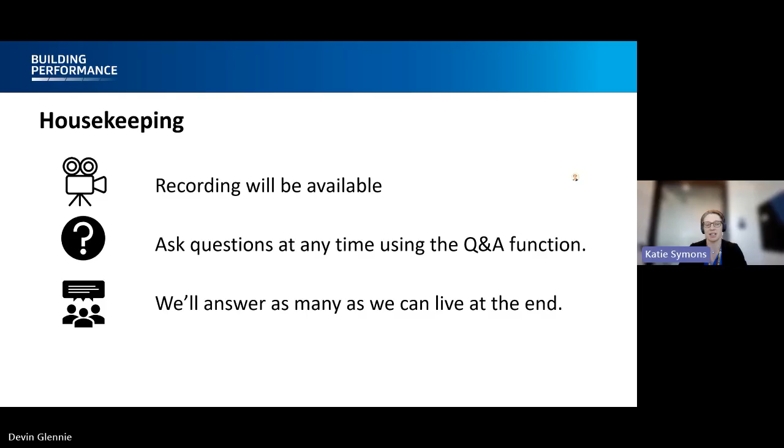First, a quick reminder about the background to this work and how it fits into our wider Overseas Building Products Work Programme. For those of you who watched the webinar in June, you will recall that the building product specifications is one of 3 pathways MBIE has been developing to make it easier to use overseas building products here in Aotearoa, New Zealand. The intention of this work is to increase competition for building products, reducing their costs to support the government's primary objective of making it cheaper and easier to build here.

Also worth noting briefly that the building product specification is the only one of these pathways that is currently live. More information on implementation timeframes for the other 2 pathways is expected around mid-September. So please make sure you are signed up to our mailing list to hear about this when it happens. But back to the BPS.

One of the drivers for the development of the BPS was acknowledging that a barrier to using overseas products is the wide range of product standards that are cited across our many acceptable solutions and verification methods. So up until now, of the approximately 450 standards cited in our AS and VM documents, about 250 of them were building product standards, and a majority of these product standards, about 140, were single standards for a given product. There were no alternative options. These standards were also spread out across a number of acceptable solutions and verification methods, meaning it was difficult to identify all the standards that a single product must comply with.

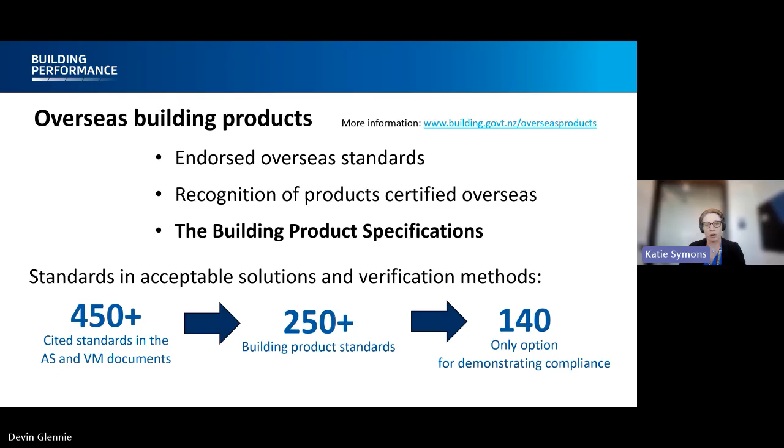So, to help support the use of overseas products, we have introduced the Building Product Specifications, the BPS. The BPS is intended to be a central resource for building product standards to be used alongside acceptable solutions and verification methods to demonstrate compliance with the building code. This is intended to provide more options for building products, but not change minimum requirements. The BPS contains product specification information, including citations of product standards that were previously found in acceptable solutions and verification methods. Alongside this product information that already existed, the BPS contains new citations of additional product standards that have been assessed as requiring equivalent or better performance.

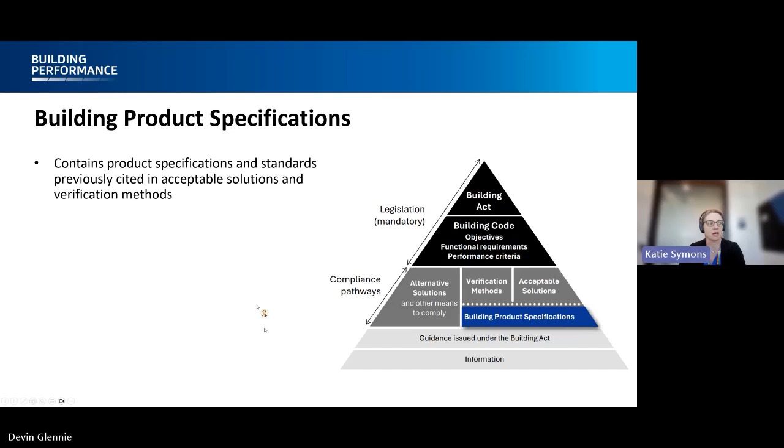Acceptable solutions and verification methods can now reference the BPS for information related to building products. When they do this, the specification requirements in the BPS become part of the acceptable solution or verification method. However, the acceptable solution and verification methods must still be adhered to in order to comply via those compliance pathways, and that includes how the specified products are used within the scope of the AS and VM and any limitations. So in other words, you cannot use the BPS in isolation to demonstrate compliance.

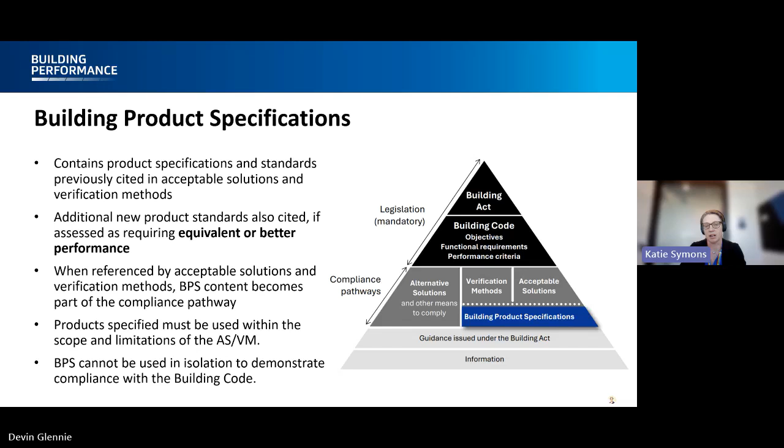Just because a building product is made or tested to a standard cited in the BPS, it doesn't necessarily mean that the building work complies with the building code. So we ran a consultation on the draft of this document back in June, and we'd like to thank everyone that took the time to make a submission to us through that process.

We proposed over 120 standards for the first edition of the BPS. The vast majority of them, around 90%, were either joint Australian New Zealand standards or were from other overseas jurisdictions, and around half of them were either new or updated product standards.

We received 71 submissions in the consultation, which largely agreed with the proposed standards, but we did make some changes as a result of your feedback, including citations to some of the proposed timber and steel standards, and also minor changes to the document's section numbering.

And as part of the consultation, we also asked for suggestions of product standards we could consider for including in future editions of the BPS. And we received well over 100 of these, so thank you so much for that. This feedback is really valuable as we are already working on developing the content for the next edition.

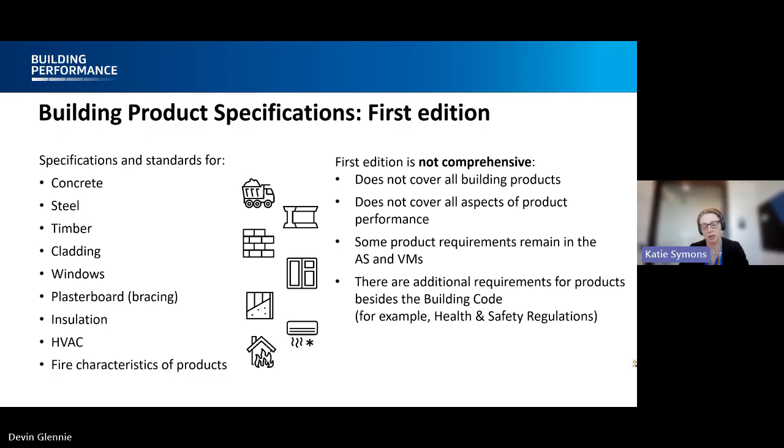But it is important to note that this first edition isn't comprehensive. The BPS isn't yet a complete repository of building product specification information. Some of this information still remains in the acceptable solutions and verification methods. There are gaps in the document. Some sections even say reserved for future use. So these are placeholders for us to come back to and add over time.

And even for products we do have sections for in the BPS, we may not have all the specification information for that product in relation to all the different building performance aspects that product contributes to. And there may be additional requirements for use of the product in Aotearoa New Zealand that aren't related to the building code, e.g. health and safety regulations. We're only dealing with requirements related to building code compliance in the BPS.

We do want to provide more compliance options in the BPS to improve its effectiveness. So if you do have suggestions for product standards or specifications that you feel are equivalent or better than our current product requirements, please get in touch. We'd love to hear from you and work together with you to make the BPS more comprehensive.

But I'll run through a couple of examples of how the BPS is working to provide more options for products within the existing compliance pathways. So fibre cement cladding is an example of a product that has specification requirements within E2/AS1, an acceptable solution for demonstrating compliance with the external moisture requirements of the building code.

The section detailing the requirements for fibre cement cladding in the previous, the third edition of E2/AS1, contained a citation to the joint Australian New Zealand standard AS/NZS 2908.2.

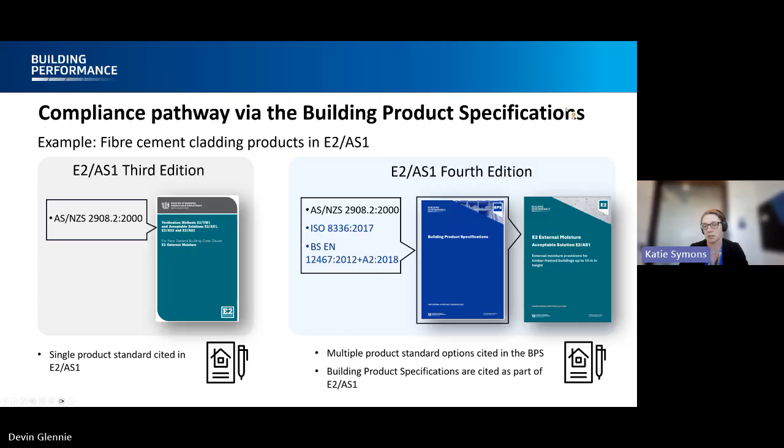So there's only one place you need to look to find the information for fire testing standards and specifications. This has been done across the suite of fire testing standards, removing multiple duplicated pages of content and providing a central resource for all the fire testing standards.

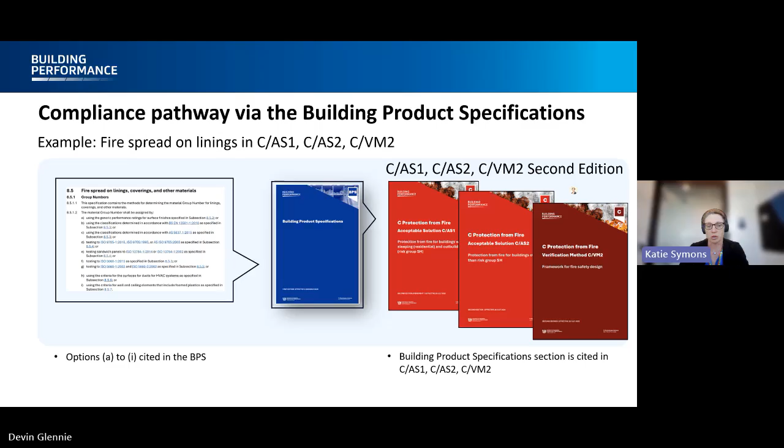So it is important to remember that in terms of building code compliance, the BPS only provides information on building products themselves and how they must be specified, not about building work. So this could include how the product is tested or fabricated, or any physical characteristics it must have. You still use the existing compliance pathways, the ASs and VMs, to determine how the building product must be used in building work to comply with the building code. The introduction of the BPS has not changed minimum requirements set out in those documents.

So at this point, it's a good point to segue into the other part of our presentation today, the new editions of the Acceptable Solution and Verification Method documents that were published alongside the BPS. To tell us more about those, I'm going to turn it over to my colleague, Devin Glennie. Hello, Devin. Would you like to introduce yourself? Tell us a bit about what you'll be talking about today.

Yeah, so my name is Devin Glennie. I'm Principal Advisor at Building Code. So here at MBIE for the last about 5 or 6 years, I've been working to try and get some consistency across our different acceptable solutions and verification methods and help with some of the publishing aspects. So today I'm going to talk about all the amendments that have been made to the various documents to support the BPS and everything else that's been published here a couple weeks ago.

To start off with, though, I'm going to talk about another announcement that was made on July 28th, so the same day the BPS was released. We also announced that we'd be looking at a 3-year review cycle for the building code. So this follows along similar trends in other countries where they have a predictable cycle, and that cycle is usually 2, 3, or 5 years, depending on your area of the world. So we're going to be looking at a 3-year cycle. So what does that mean? It means that we're in 2025. We're publishing a bunch of documents this year. Our next major update will be in 2028.

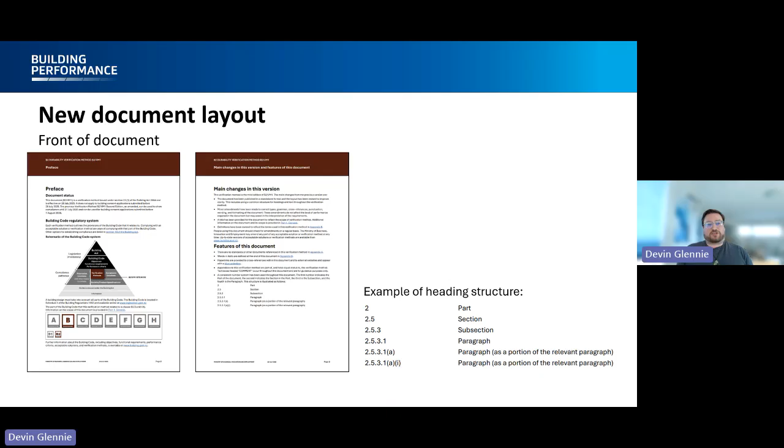The new layout also has an introduction page, which has the same 4 basic headings for every document. There's an introduction that talks about the scope of the document, items outside of the scope of the document, and the compliance pathway. So it gives you very basic information about what the document can be used for, what things are in scope, what things are out of scope, and what part of the building code it can be used to comply with.

Some of our documents historically have had none of this information. If you opened up the document, there'd be nothing there at all. It wouldn't tell you what buildings it could be used for. It wouldn't tell you what parts of the code it could be used for. And it is a lot more difficult to use if you have to first figure out what this thing even applies to. So we provided the same consistent level of information for each document.

There's other things within that part 1, depending on the document you're looking at. Some of that information may be about how to use the document, some of the basic input data, or there's even sections now that talk about the building product specifications and how they're used for compliance as well. So that's all contained within that part 1, some of the general information about the document.

You'll also notice that we've moved appendices to the end of these documents. So we have consistent appendices across each AS/VM: Appendix A, references, and Appendix B, definitions. Previously, these were at the front of a lot of our AS/VM documents, which means you'd have to scroll by them if you want to actually get to the content.

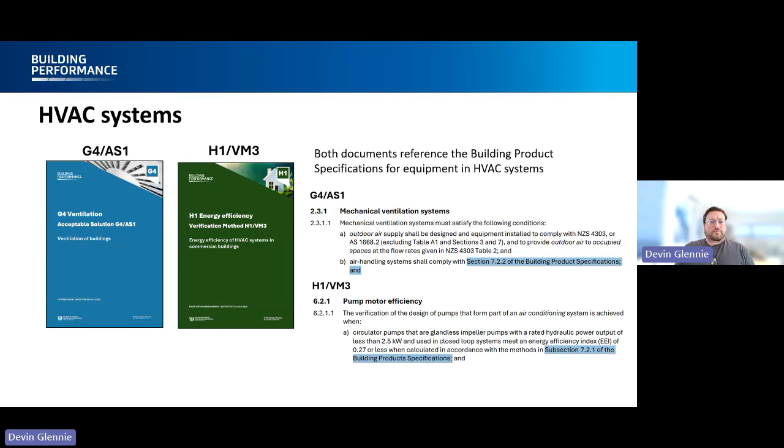So if you have things like checklists or templated reports or standard details you might be using, and if you want to know where those have gone, where they shifted between editions, you can use these information packs to find that information quite quickly. You can look for the old number, you can find the new number, and you can find out if anything has changed in that paragraph.

So those are all available on our website on that same link, the BCU 25. And we have these information packs for all the longer and more involved changes. So I think there's 10 or 11 of the 16 have these same kind of tables outlining all the changes.

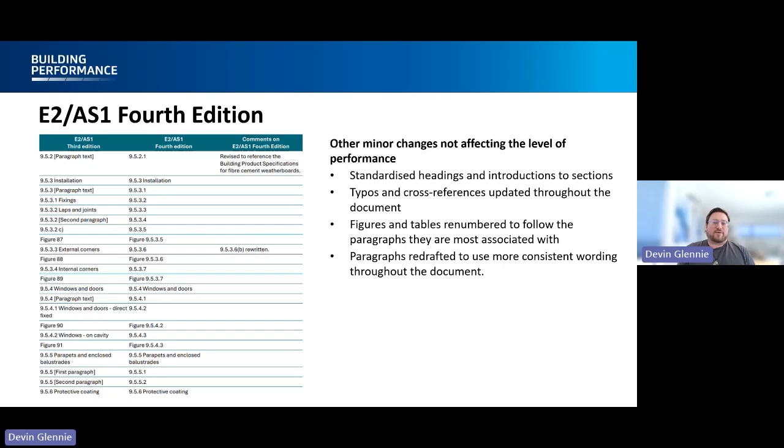And some of the paragraphs have been rewritten to use more consistent wording throughout the document. There's a number of defined terms in E2/AS1. However, not all the content was written to use those defined terms. We've tried to incorporate that where we could.

So we've tidied all that up. So now it's laid out in the same manner, in the same kind of numbering format, which can help ease of use in reading these documents. So the content actually hasn't changed. If you look across the 4th edition, those wordings and the requirements in the paragraphs have not changed, but some of those numberings have. So again, I would refer you back to those information packs we provided. It tells you where the old numberings are in the old edition and what the new numberings are in the 4th edition.

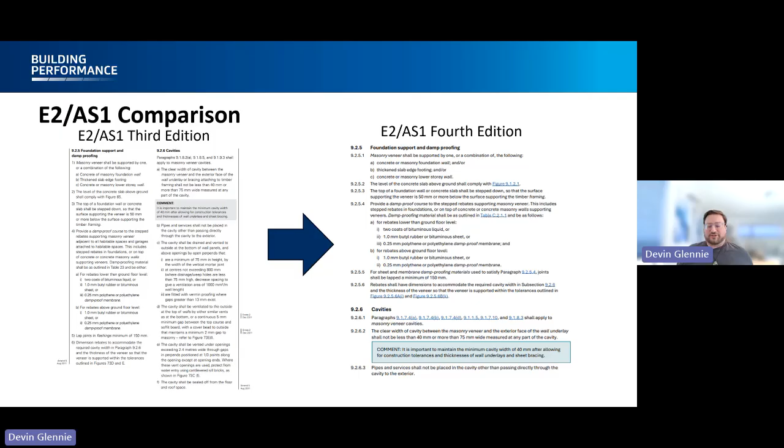Moving on to B2AS1. So the 3rd edition of this document references the building product specifications for some of the timber requirements. And as well, it's been updated into this new format. With referencing the timber requirements in the BPS, a lot of the content was actually moved from B2AS1 into the building product specifications. This is noted in those information packs. There's a number of instances where it tells you that it's been relocated. So a paragraph hasn't disappeared. The requirement is still there. It's just been relocated as it refers to a product specification as opposed to requirements on how it's used.

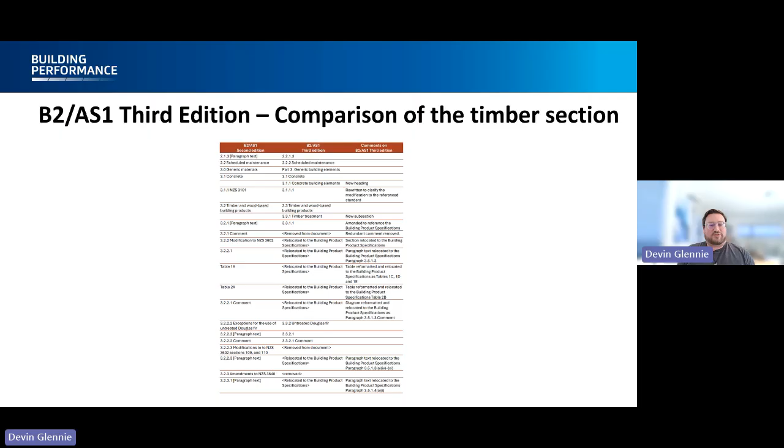So these are noted, and if you're trying to find this information, look at those information packs, and it can tell you exactly where things have gone. One thing to know about B2AS1, we did pick up a typo here in just the last week. It refers to section 3.6.1 of the building product specifications. This section doesn't exist. It's actually subsection 3.5.1. It's quite obvious because it tells you to go look at this section for 50-year durability, but that section doesn't even exist in the document.

And that's a consequence of some of the updates made post-consultation. It was one of these minor typos that just weren't fixed. So this section of B2AS1, just note for now, it refers to the wrong numberings. We'll be trying to update this when we can and try to resolve that issue. But like I said, it's a pretty obvious error because that section number doesn't exist, and the title of the actual subsection it points you to is the requirement.

Now on to some of the larger changes in the content structure. We're looking at CAS1, CAS2, and CVM2. So these 3 documents are used for compliance with protection from fire. Like Katie mentioned, all references to the fire testing standards have now been relocated to the building product specifications. So a complete removal of all that content, which has some big impacts. There were previously appendices in each one of these documents that outline those fire testing requirements. So those have all gone. They've all been consolidated in the building product specification. So a lot of the repeated text just completely removed from these documents.

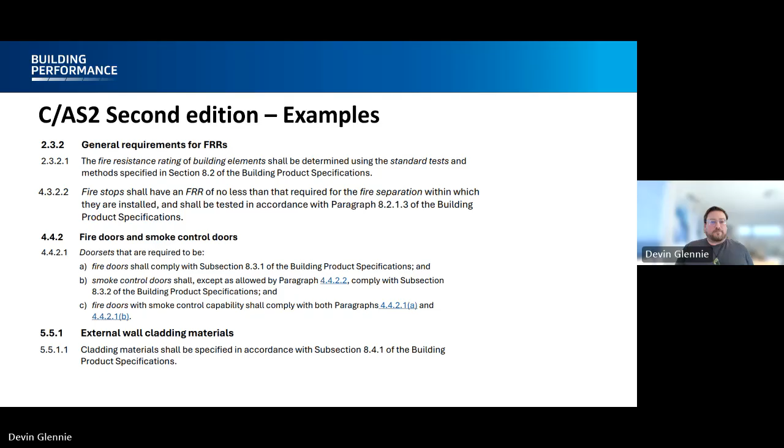So the comparison here of just how we've condensed down and simplified these headings. Here's one part, which is means of escape. It had 16 different sections in the previous edition. That's been condensed down to 9. And the headings that are gone, they've just been consolidated into different sections in the document. So some of those things like escape from basements only had a single paragraph, or things like signs only had a single sentence on what you needed to comply. And so that's been condensed down into the new edition.

The same things happened in part 4 and part 5 of the document, where I think part 4 had previously about 18 different headings. Now it's down to about 12 or 13. And part 5 the same. So kind of restructuring that content to make it a little bit easier to use and easier to navigate throughout the documents.

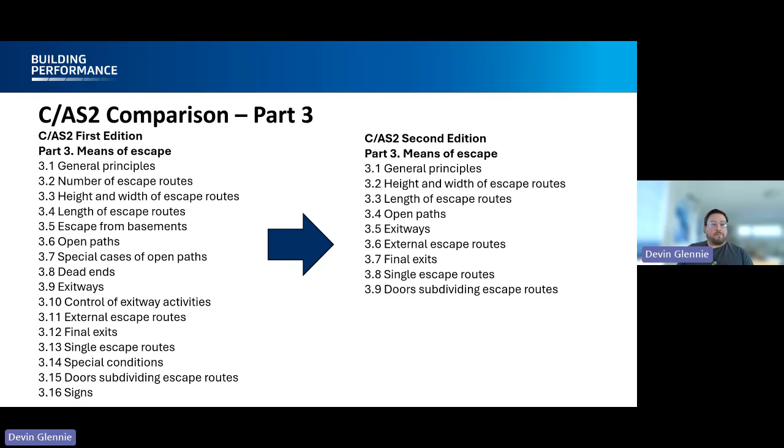Another thing to note about CAS2, another one of these typos we picked up. This one's actually already been updated. It was picked up on the first day it was published, and it was just simply a formatting error. So table 2.2.1.1, some of the values were previously showing without the superscripts, which can lead you to a different interpretation of what fire safety systems are actually required. So we've updated that. That's already online. It was changed the same day.

If you've downloaded the document in the past, you might just want to re-download it or at least print off that same page. That's the only page that's changed. If you're loading it in your browser, you might have to actually refresh the window before you get the new version, but essentially it's been already updated online.

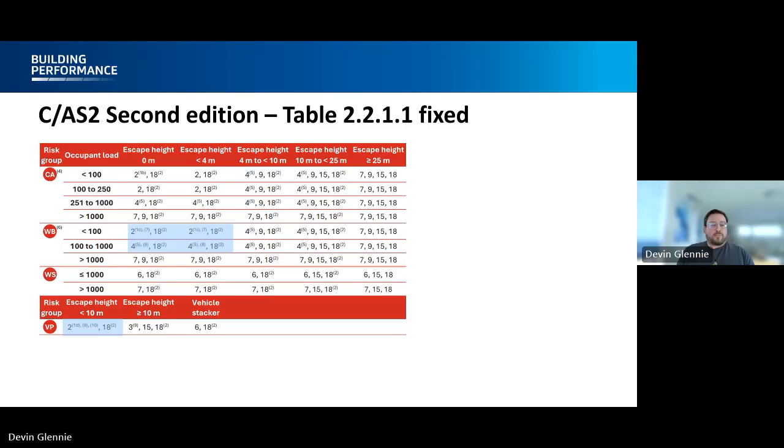Like I said, CVM2, a lot of the design scenarios have changed. This is just an example of the IS scenario where it was previously about a page of text outlining different fire testing requirements to determine group numbers. That's all been relocated to the building product specifications, and instead the design scenario just refers to the different sections in the BPS where they're relevant. So it's consolidated a lot of the content out of the verification method, which is only necessary for the product testing.

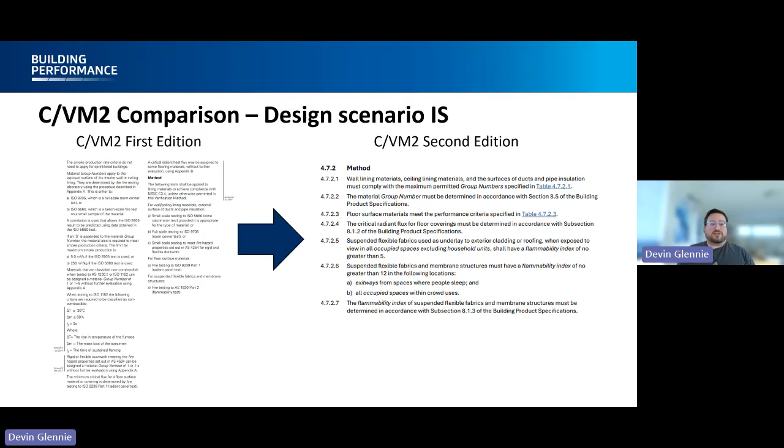Fire safety review. I kind of mentioned this at the start of this section, but we made an announcement last Friday on the next steps of our fire safety review. So in 2024, we consulted on issues in the fire safety provisions in the building code. This is based off a review that we had undertaken, incorporating stakeholder feedback and discussions with others in the industry about what the problems were in the building code.

So we put those in a discussion document. We consulted on it late last year. We analyzed the submissions this year, and suffice to say there was broad support for the issues we identified. Issues around the consistency of the requirements, the level of safety being provided, keeping up to date with new technology. There were a number of issues that were identified in the existing building code clauses.

So on Friday last week, 8th of August, the government announced plans to change those clauses, and we'll be working on proposed building code changes for CAB to consider early next year. So the announcement here is really that these clauses will probably be changing in the near future, or at least next year, and that the acceptable solutions and verification methods will have to be updated once new clauses are in place. We expect there'll be a transition period through that as well. So there's nothing on the immediate horizon, but just to let you know that this is kind of the next stages of our review.

All right, to end out this section, we're going to talk about some of the B1 documents. So B1 Structure, there's 2 acceptable solutions and 2 verification methods. All 4 of these have had updates to incorporate references to the building product specifications. In some cases, it's just minor, it's just a single reference. In some cases, there's multiple different items, but we've incorporated at least 1 reference in each one of these documents.

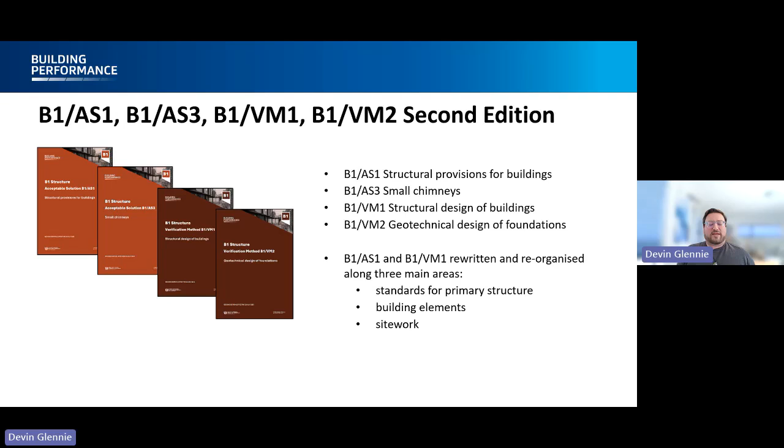So there's standards for primary structure, so things like concrete, timber, steel, aluminum, earth building designs. That's in one part of the document, and then other parts include a section on building elements, so things like windows, glazing, and drains, and then site work as well. And that's actually how the code clause is organized itself. It talks about buildings, building elements, and site work. So we try to reorganize these documents consistently with the way it's outlined in the code clause as well.

Going into a little bit more detail here, you can see B1 VM1 previously had 12 or 13 major sections. Some of those were a sentence, some of them were multiple pages. We've condensed that down, and like I said, it's 3 different sections now: buildings and structures, individual building elements, and then site work. B1 VM1 also has a bunch of inputs on the structural design actions, or the loads used. That's also been separated out to its own part as well. So consolidating some of that content to make it a little bit more clear how to actually use the document. The structural design actions haven't changed, so these are still the same loads in the document.

So that's the major part of the document. That's unchanged. So the only thing we've been looking at is product standards, and these relate more to the design side. So this stuff is unchanged. And we provide that overview of which of the suite of 1170 standards are used, including their version number and year, and amendments used as part of that.

B1 AS1, again, has been consolidated in terms of its format and layout. It's a little bit more simple than B1 VM1, so there's no section on loadings, and there's no section on site work either. But there's buildings and structures and individual building elements. And again, the major design standards, masonry, steel, timber, earth buildings, those are all recorded and presented in one section of the document.

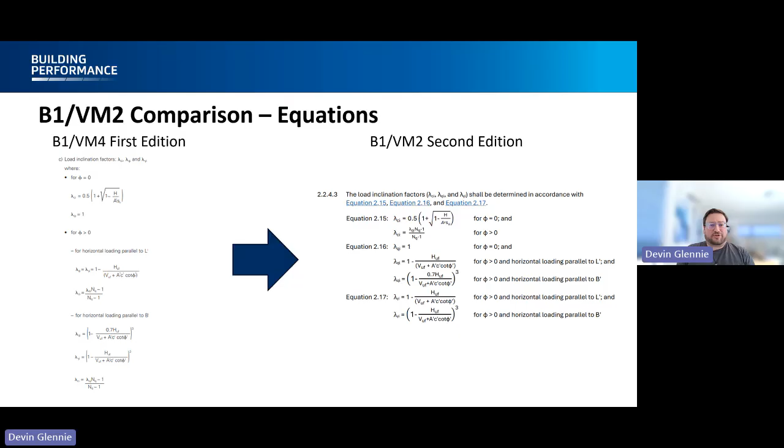In the pile foundation section, there's actually very similar equations presented for over 13 different types of soil and drainage conditions. And we've actually provided a table that lists out which paragraph applies to which one of those and which set of equations would apply for this situation. Try and simplify the use of the document so you can immediately see, oh, if I have this condition, these are the paragraphs I need to refer to.

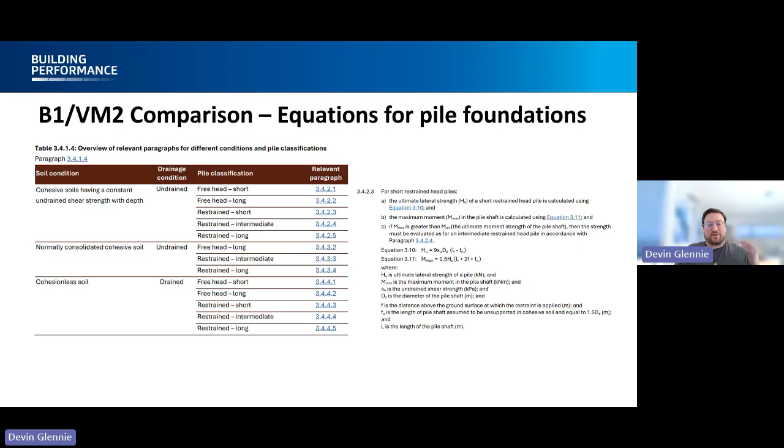So if you look on the right-hand side there, paragraph 3423, it now tells you for short restrained head piles, these are the equations you have to use. Those are provided below. We've also provided the notations with those equations. So VM2, or VM4 previously, just had one single page that had all the notations for every single equation together, which meant that you'd have to flip back and forth if you wanted to identify a single term. So we've located all those different notations along with the equations they're associated with to try and simplify that process. So you can look at the equation, you can look at the terms, and continue working through the document.

All right, well, that wraps up my section here. I'm going to turn it back to Katie, who's going to attempt to summarize 17 documents that we just published in our webinar today. Back to you, Katie. Thanks, Devin. Yeah, that brings us to the end of the prepared presentation. But yeah, a quick summary of what we have covered.

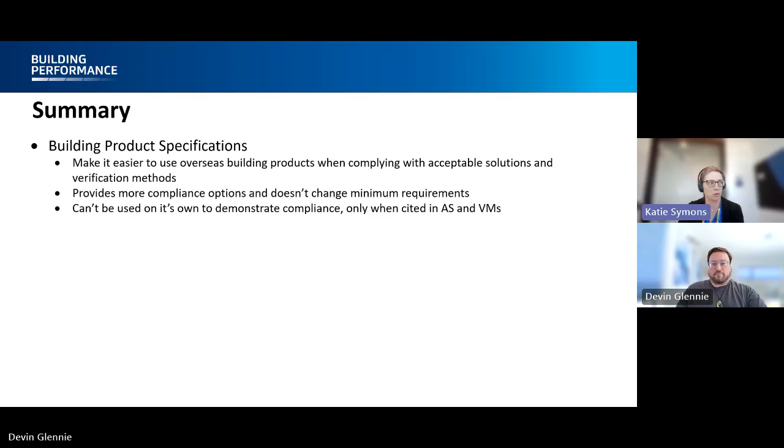Moving on to the updated acceptable solutions and verification methods. So 16 of these documents have been reissued by MBIE and have been updated to cite the BPS. At the same time, we've taken the opportunity to improve the format of these documents, make them consistent across different code clauses. We've published information sheets for some of these documents, which map out the changes to the content between the old and the new versions. And don't worry, there is a 1-year transition period to adjust to these new editions. The old ones will be accepted until July 2026.

There's still something funny with the slide. Sorry, it's not catching up with me.

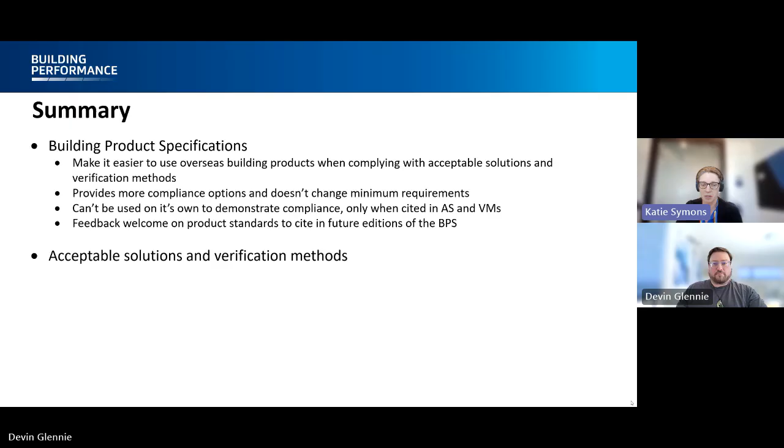But yeah, having wrapped that up, we can move on to hear from some of you and take any questions that you might have. And yeah, there's a lot of them.

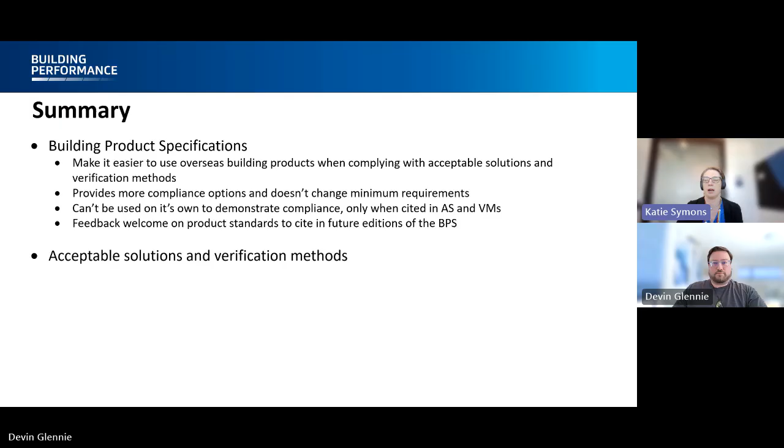So I've answered some questions as we've gone through, but one of them that kept coming up that I will address now: access to overseas standards that are cited in the BPS. So MBIE provides access to key New Zealand standards that we cite in our building code. Yeah, we sponsor access to make them freely available. We're not able to do that for standards that are published by overseas standards organisations due to copyright reasons. So any overseas standards that are cited in the BPS, we're not able to provide access to them.

The intention of the building product specifications and this work is to provide more options. You don't have to use them, but should you choose to, those product standards are cited. So yeah, that's that one.

Devin, I noticed there was a question, maybe this is a good one for you. Someone was asking about whether our documents and the building code are going to be made available for a sort of AI web application anytime soon. Perhaps you want to talk to that one? I know there's people out there who've already developed their own free tools to do this. There's nothing that MBIE is currently working on.

However, we're trying to do a few different pilot projects to see how we might support some digital use of our documents, recognizing that PDFs is one format. We might want to actually make these available in other formats. But again, there's nothing here to announce today. That's something that's been in progress for some time now.

Yeah, thanks, Devin. I also noticed perhaps there's another one for you about fire performance via the BPS. For FRR group numbers, now routed through BPS references, will ILAC accredited overseas fire labs be accepted across the board? How should designers cite reports in consents? Should they do the BPS section or the underlying test standard?